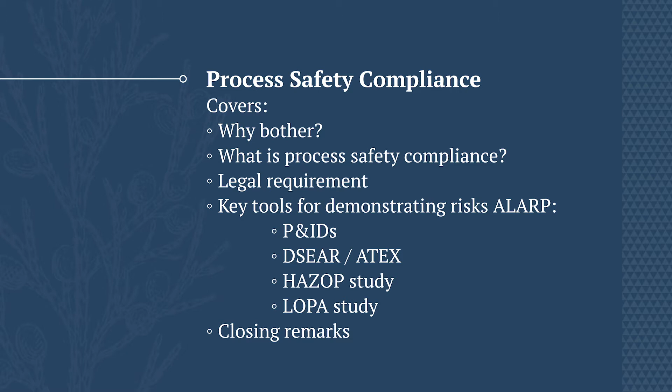So the contents we're chatting about today: process safety compliance. We're looking at why do we bother, what is it, legal requirements, key tools for demonstrating risks are ALARP, and some closing remarks.

So why do we bother? Often we hear, this doesn't really affect my distillery, maybe we think it's too small, etc. But the reality is it does affect every distillery handling flammable material, i.e. alcohol, and you can't really be ignorant of the risks. It's not an excuse. Other things as well - legislation is for the big distillers, it's not relevant to us. That's really a popular misconception, and it goes right back to the 1974 Health and Safety at Work Act in the UK, where every employer is required to provide a safe place to work. So it affects everyone.

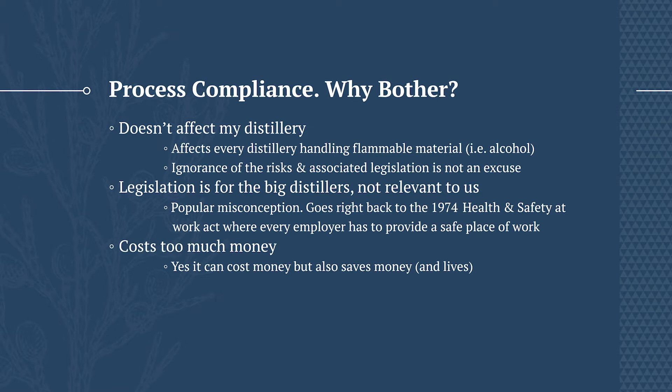And it can cost too much money - yeah, it can cost money, but it can also save money. I've not time for safety, I just want to go on and do my project - yeah, true, but it can actually save time as well. If you get design done up front and do it correctly, it can save a lot of installation time. It'll never happen to me - yeah, we all think that a lot of things in life, but unfortunately it does happen, and there's some slides coming up which will show you that.

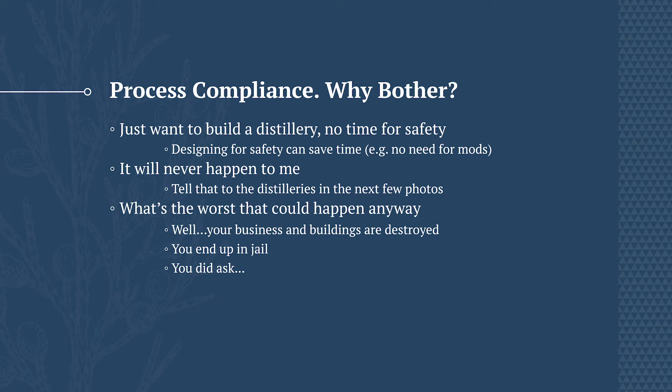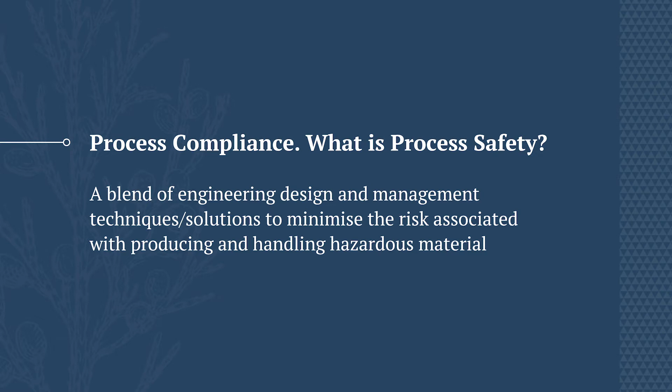So what is process safety? It's a blend of engineering, design and management techniques and solutions to minimise the risk associated with producing and handling hazardous material. These can include risks to people, the environment, and obviously major cost or significant loss as well.

In craft distilling, the key industry risks - you've got explosion from vapour detonation if you've got a vapour release, explosion from fire engulfment of vessels. If you're handling cereals, you've got dust cloud detonation. You get risk from fire, from pool fires, flash fires. We're dealing with materials with low flash points, particularly in craft distilling when you're dealing with GNS, 96% alcohol, which has a flash point of 13 degrees centigrade, so it's highly flammable.

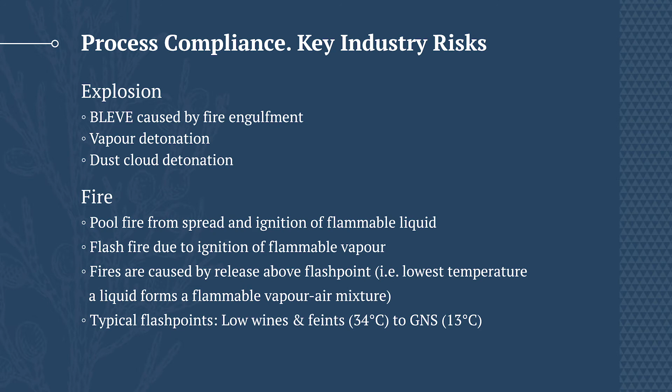We've also got toxic or harmful releases - release of carbon dioxide from fermentation, and also cleaning chemicals. But this presentation is really focusing on the fire and explosion risk.

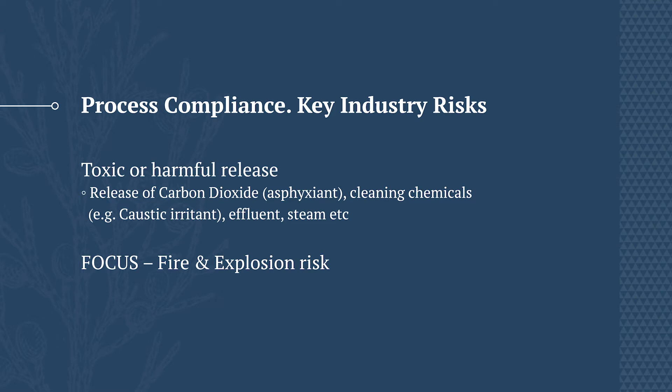Looking at legal requirements, we really have to look at demonstrating the risks are ALARP, which is as low as reasonably practicable. To do this, as well as designing to relevant standards and guidance, the following would be expected to demonstrate risks are ALARP.

We're looking at having a full set of P&IDs, ATEX Dsear documentation complete, risk assessment done - for example HAZOPs - SIL determination done using, you can use layer of protection analysis. In our experience, there's a lack of these in craft distilling.

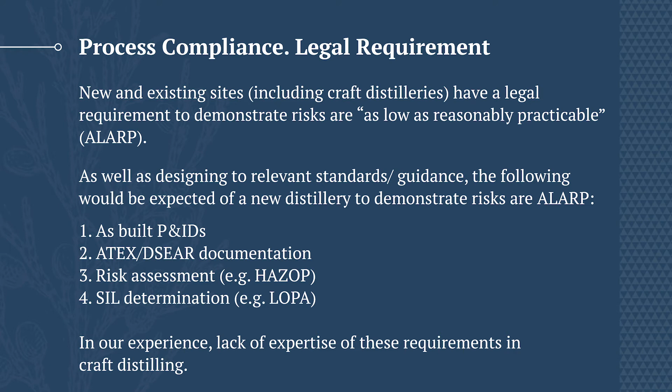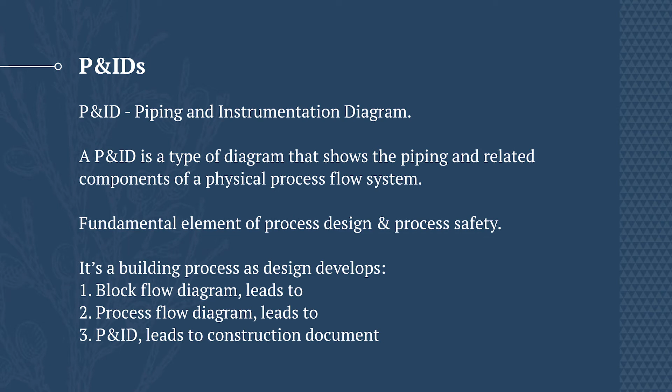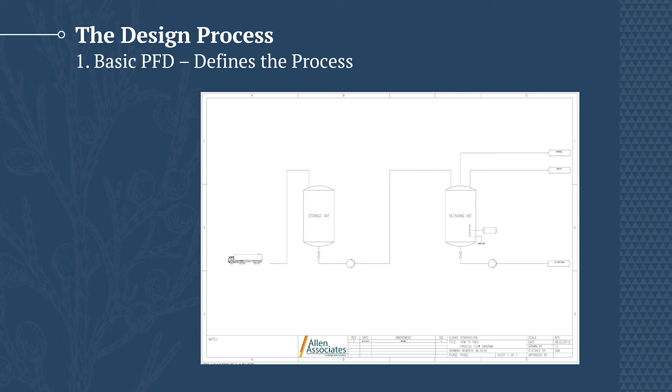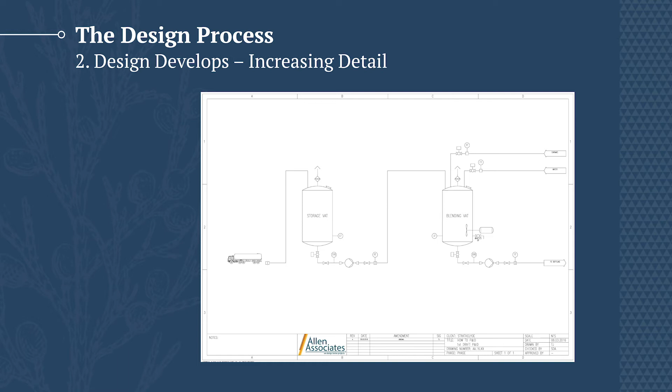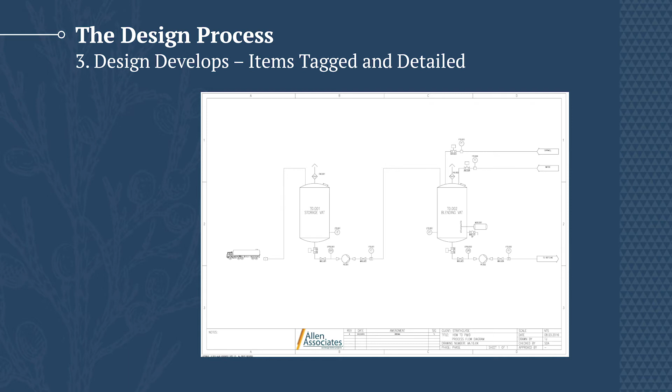As we add in more detail, we're now showing more instrumentation, valving, etc. Then we go through and start to show tags on the individual items, and finally we can start to show control and safety loops. So that's how a P&ID process develops. Ideally, everyone should have a set of P&IDs for their site.

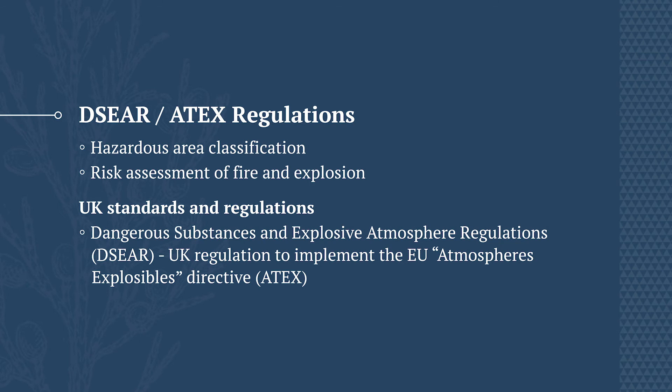Moving on to the DSEAR and ATEX regulations, which essentially deal with hazardous area classification and the risk assessment for fire and explosion of the area. In the UK, the regulations are the DSEAR regulations, which implement the EU Atmospheres Explosibles Directive, ATEX. Throughout the world we follow very similar regulations, and there are other regulations on the list which can be relevant and useful guidance for ATEX compliance.

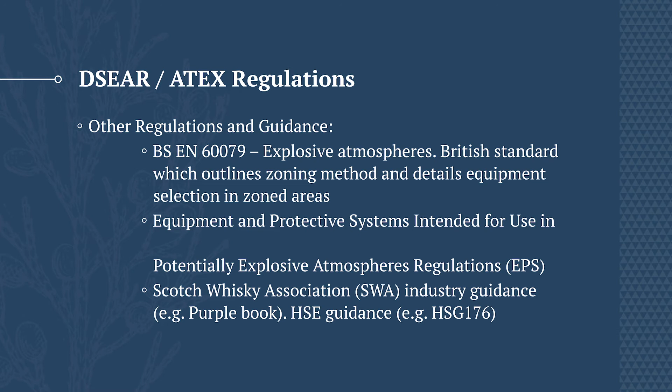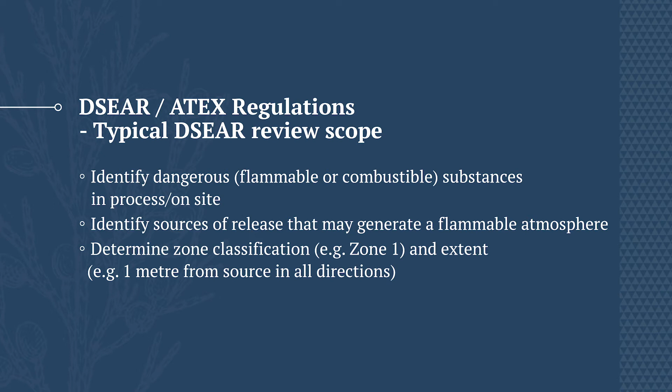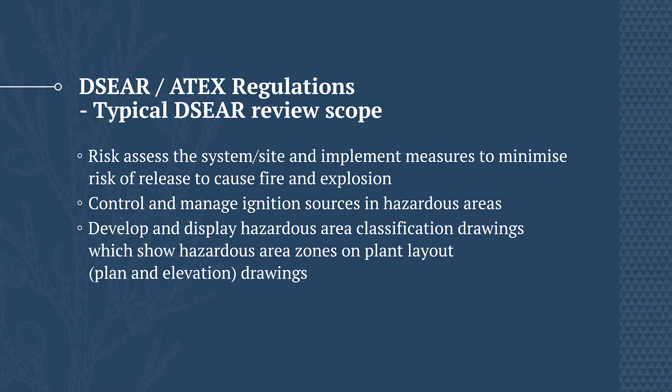A typical review scope would be: first, identify the flammable or dangerous substances on site or in the process. Identify sources of release that may generate a flammable atmosphere. Determine the zone classification. Risk assess the site, the system, etc. Implement measures to minimise the risk of release. Then control and manage ignition sources in the hazardous area, ensuring all your equipment is ATEX rated. Then develop and display the hazardous area classification drawings, which show the zones on the plant layout drawings.

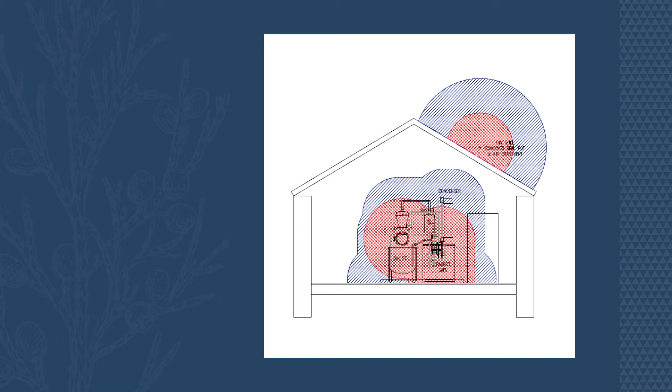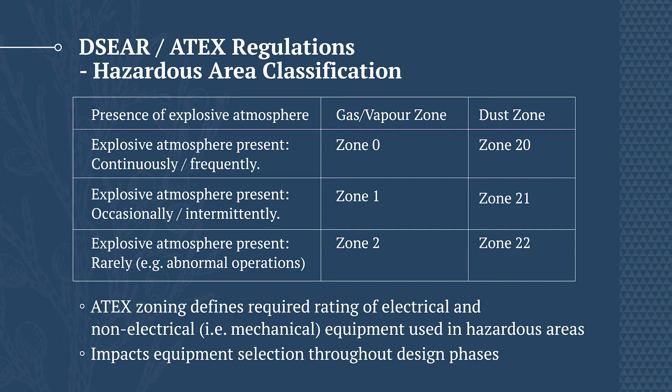Here's an example of a gin system which has been zoned, this is the elevation drawing. The regulations changed a few years ago so you now have to do elevation drawings as well as plan hazardous area drawings. Looking at the zoning itself: zone 0 is where a gas or vapour is present continuously or frequently, zone 1 if it's present occasionally or intermittently, and zone 2 is during abnormal operations, it's rare that you have it. Zones 20, 21 and 22 are for dusts.

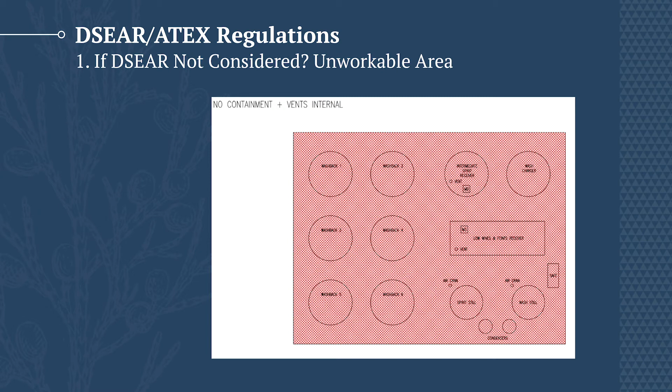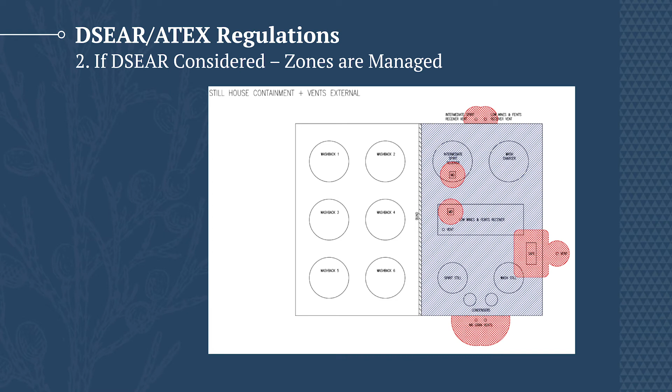Looking at an example of DSEAR or ATEX not being considered in the design process: here we have a stillhouse area next to some fermenters, and at the moment we're assuming there's no containment and nothing is vented outside, which we do see, and this gives us a zone 1 area which is really unworkable, and in fact operators should not be in that area. If we move on and see what we can do to improve this, we should be able to get a situation where it's mainly zone 2, that whole fermentation area is actually safe, and you've only got small pockets of zone 1 areas.

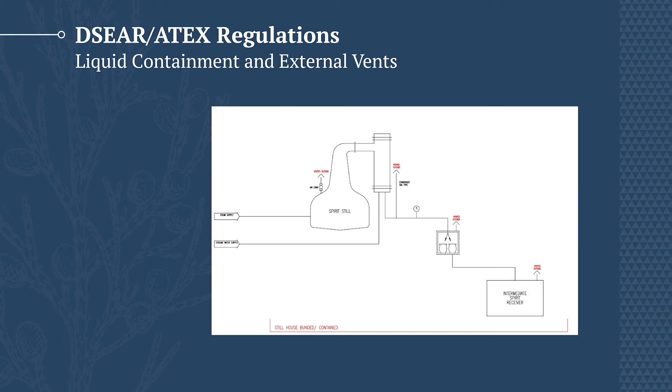So how do we do that? Well, in the risk assessment, you would assess where the releases are and what they're doing. In this case it's relatively straightforward: vent everything outside from your stills and your receivers, now put in containment so any spills in the stillhouse cannot go into the tun room or the fermentation area, and that gives you the ideal zoning for that process.

So as you can see, looking at the DSEAR ATEX regulations for designing, it's vital to consider this at the design stage, because you can make these changes at the very beginning of your design and it affects everything. It affects your process layout, your drainage and ventilation, and your visitor routes as well. So it's something that should really be done alongside the design process rather than being considered at the end, when your distillery is being built.

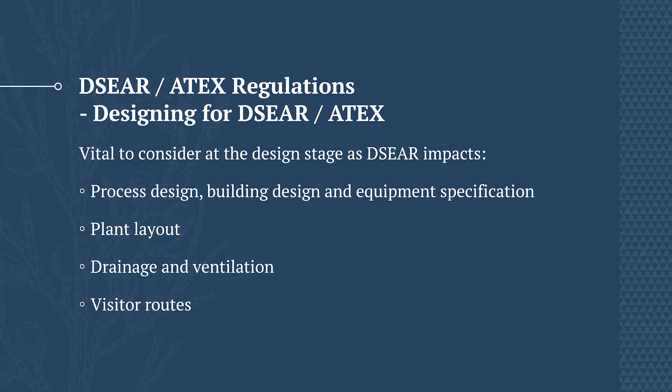How do we identify further hazards in the process? There could be remaining issues in this design which we've not picked up through DSEAR, and this now takes us on to the HAZOP study, which is a key milestone in the design process and interrogates the design in detail. The HAZOP study is a hazard and operability study, also known as deviation analysis.

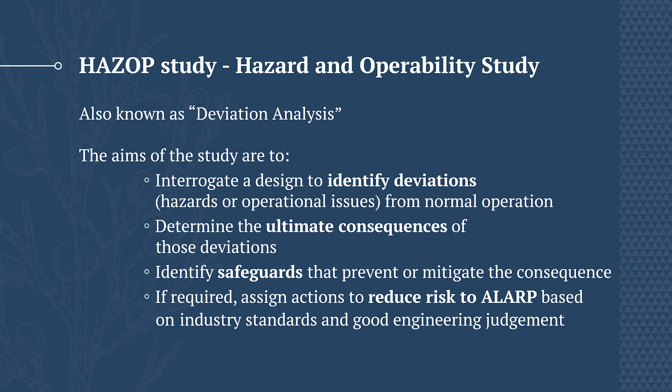The aims of the study are to interrogate the design, identify deviations, hazards or operational issues from normal operation. Then you determine the ultimate consequences of those deviations, identify safeguards that prevent or mitigate the consequence, and if there are no safeguards, or if required, then you assign actions to reduce the risk to as low as reasonably practicable, based on good industry standards and good engineering judgment.

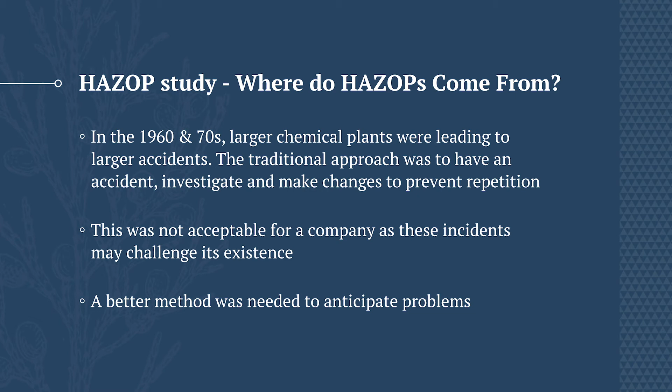So where did the HAZOP come from? Well, it goes back to the 60s and 70s when there were larger accidents with bigger chemical plants, and the traditional approach to prevent repetition was no longer acceptable. So a better method was needed to anticipate problems.

What causes these accidents? Well, plants are typically designed for flow sheet conditions, i.e. normal conditions. The key thing about the HAZOP is to identify plant operations, what happens under abnormal conditions, and that's where we go back to the deviations. Deviations are various: you look at start-up shutdown conditions, higher flow conditions, higher pressure conditions, higher temperature conditions, and for example high level is another one, high level deviation.

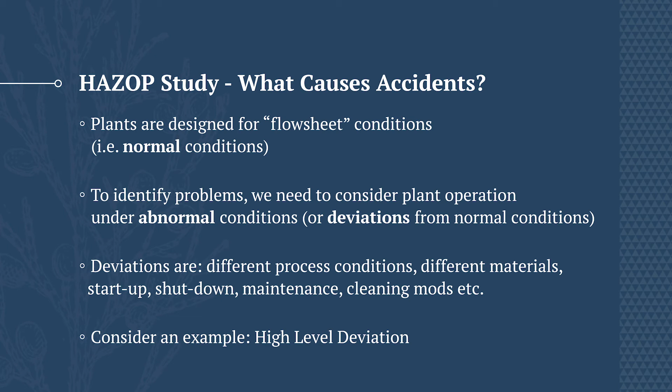If we look at this incident that happened a few years ago, there was a case where a distillery went on fire. It was associated with a high level issue on a tank, and this is something that may have been picked up if there had been a HAZOP.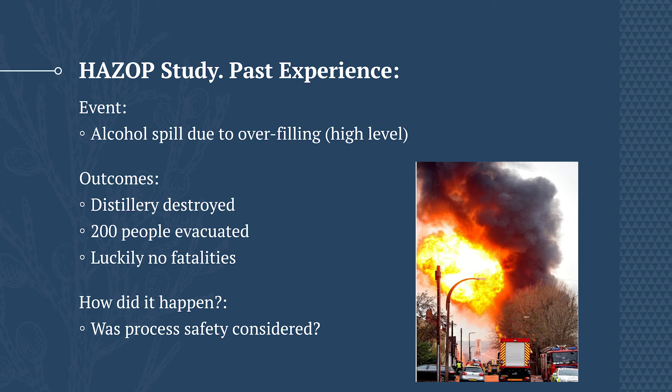So if we look at an example here of high level in your ISR, going back to the similar stillhouse before, where you've got the still and you're coming across from the condenser into your safe and then into your ISR, you look at what could be the cause of high level in that ISR.

You could have a failure to switch between feints and spirit, or maybe there was some spirit left in the ISR prior to startup that wasn't transferred across and wasn't realised. So what are the consequences? It could overfill, and the worst case is there could be a fire.

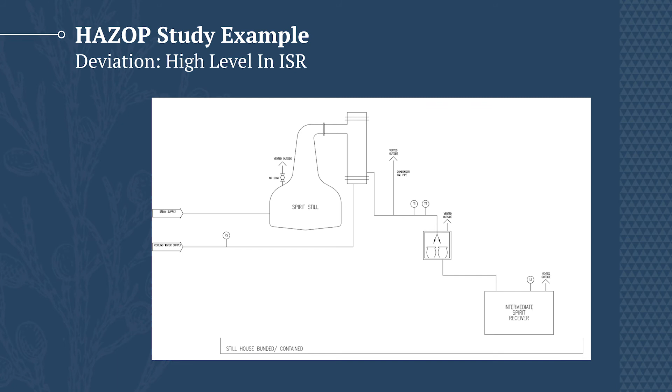What safeguards do we have in place at the moment? We've got containment, which keeps the spill contained. But is this enough? Should other actions be required? In this case, we'd expect there to be a level switch on the tank to alert the operator of high level. That's how the HAZOP identifies this by looking at the high level as a deviation.

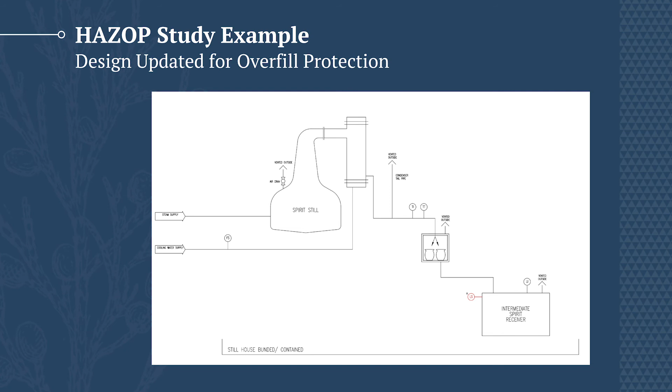Even then you'd be thinking, is that enough? Because this switch on the ISR still has to have a response from an operator. So you'd interrogate it further, and ultimately come up with the right solution, which is to have an independent high level switch, shutting off the steam to the still. So in the event of high level in the ISR, your steam to the still will shut down, which will stop producing any more spirit coming into the ISR and stop the high level event.

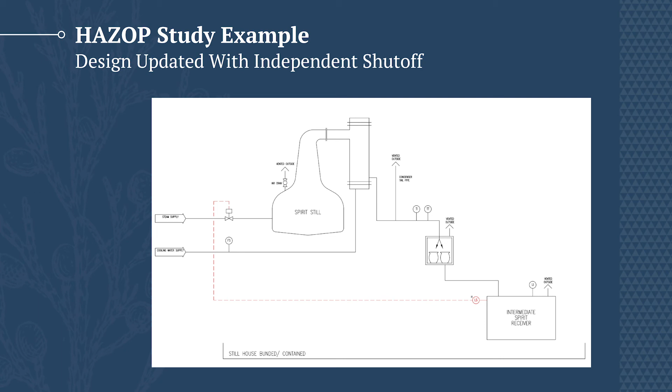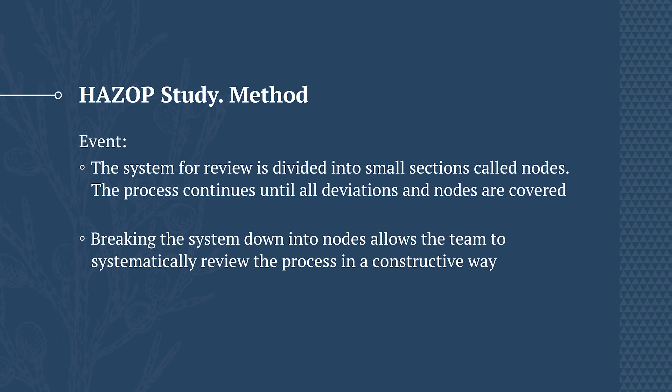This is an example of how the HAZOP process works. You break your process down into nodes, which you'd describe the previous example as one node, and then you interrogate that node with all the different deviations.

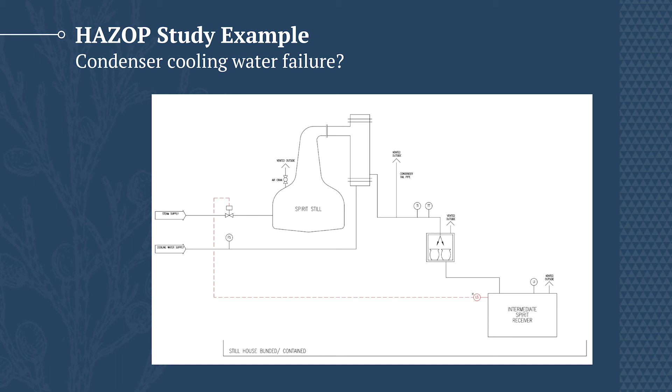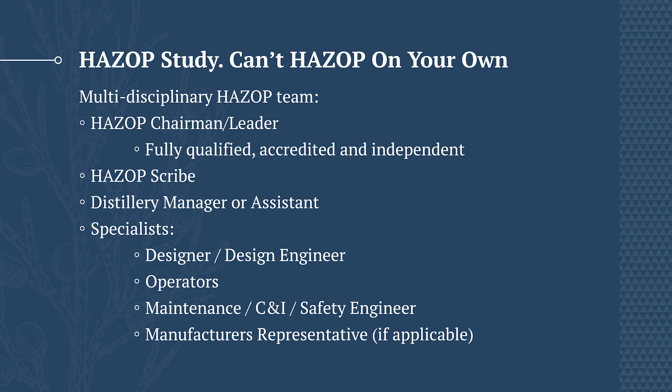Going on to the actual HAZOP study itself, you can't HAZOP on your own. It's really a team effort, and you need people in the HAZOP with the right experience. You need a chairman, a leader who's fully qualified, accredited and independent, and a scribe. Ideally people who understand the process: distillery manager, assistant manager, brewer, process designer, potentially operators and maintenance as well. And if there's a particular piece of manufacturing kit, for example a whole still package, then the manufacturer's representative should be there as well.

So I'm just going to talk a little bit about the LOPA study, layer of protection analysis, which comes after the HAZOP. This really looks at scenarios which result in a severe consequence, for example a fatality, which requires further study to ensure the risks are within tolerable limits.

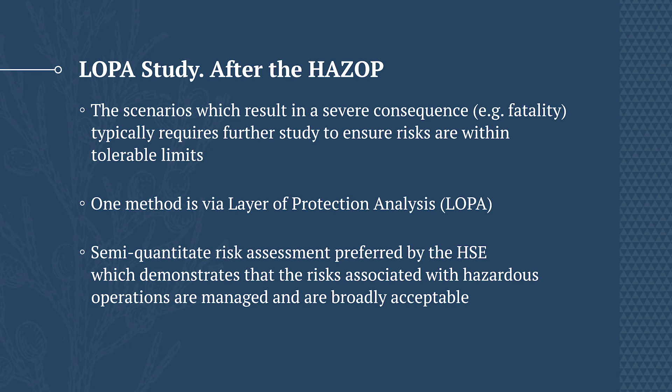The LOPA study is preferred by the HSE in the UK. It's a semi-quantitative risk assessment which demonstrates that the risks associated with hazardous operations are managed and broadly acceptable. The aim of the study is to determine the overall probability of each high severity event, for example the high level on the ISR, and this determines the safety integrity level, SIL, of the safety system.

Typically in distilling you might not even have a SIL level, but you could get to SIL 1, very occasionally SIL 2. If you look at the nuclear industry, they're up at SIL 4, the maximum SIL level you can go to. In distilling sometimes you don't need to go to SIL at all, it could be SIL 1 and very occasionally SIL 2. It's really all about making sure the safety system is robust and suitably designed for the appropriate SIL level, and that's what the LOPA study does.

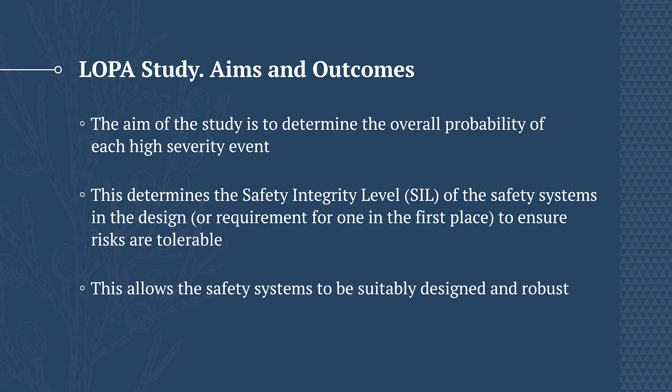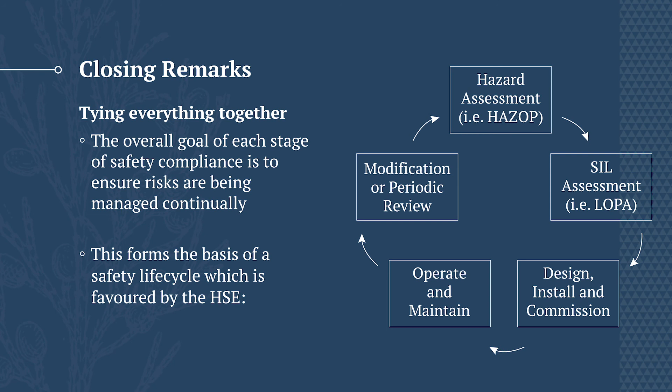Closing remarks: this is all about pulling everything together and having a proper health and safety life cycle to form the basis of safety for your plant. Looking at your dossier, your P&IDs, managing all the changes, HAZOPing it, doing a LOPA if required, and just managing the process. That's what it's all about, and it's actually not as bad as it seems. It's a process which you follow, but it's a very important one.

This is obviously just an introduction to process safety. There are other hazards in your process - you're using alcohol in different ways, and there's also dust, particularly if you're producing GNS from first principles, you'll have grain dust. You've got steam systems, emergency relief systems, and other regulations associated with all that.